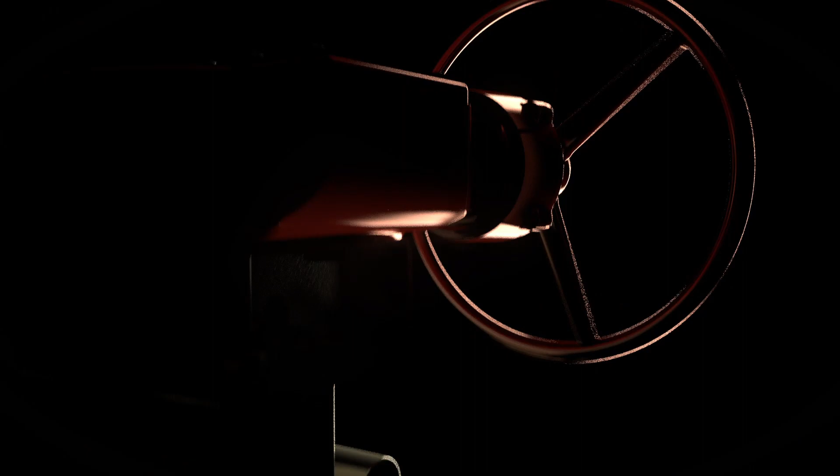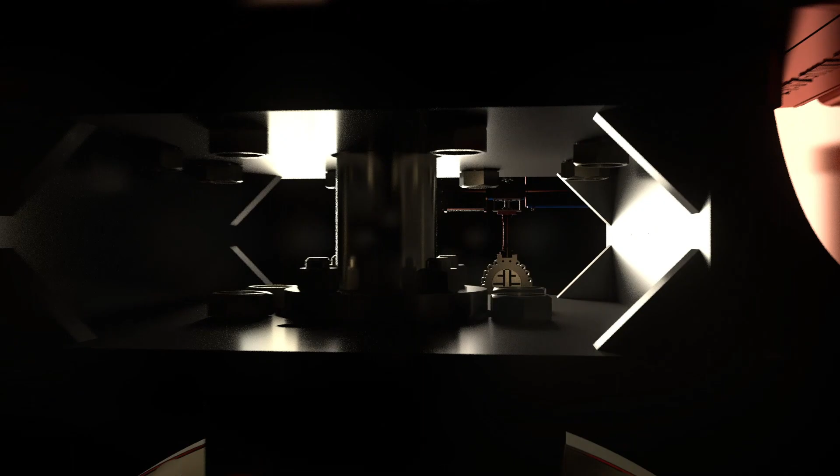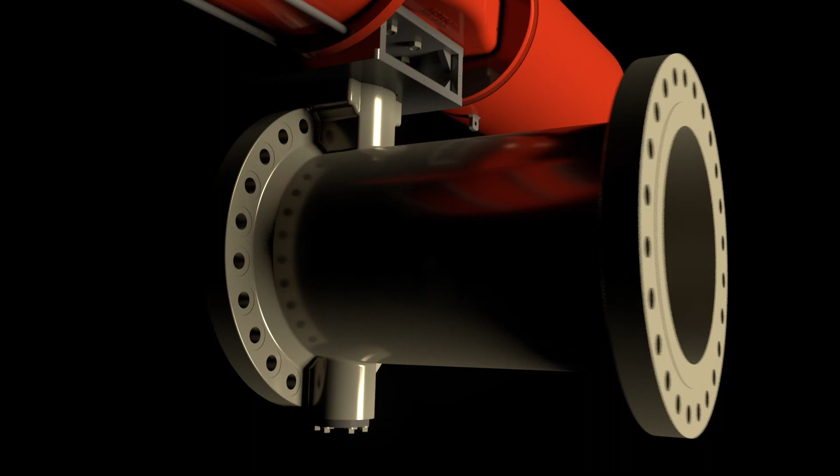Masoneilan 33000 series triple offset valves incorporate patented design features and advanced manufacturing methods to provide bi-directional, zero leakage for a wide range of sizes and pressures for both control and isolation applications. In addition to reliability and exceptional performance, these valves offer unmatched ease of maintenance that translates into real cost savings.

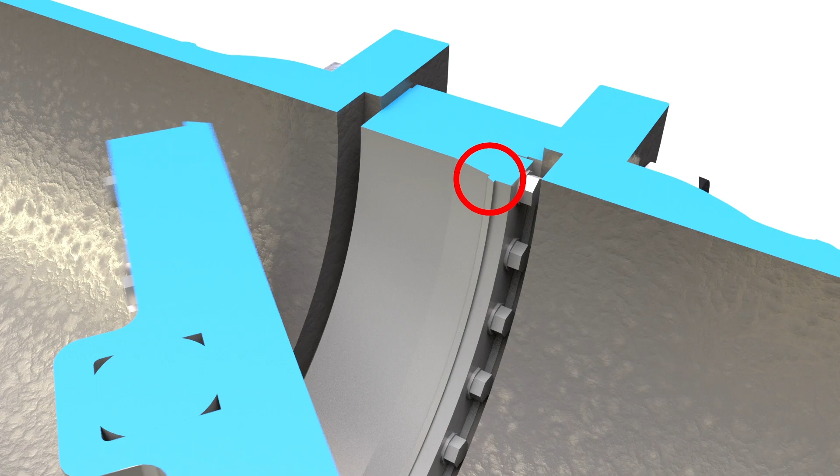The triple offset design provides smooth operation with ultra-reliable metal-to-metal sealing. There's no contact between the disc and seat ring until the final closing. This eliminates friction during throttling, which increases efficiency and eliminates the need for elastomers, soft seats, or liners.

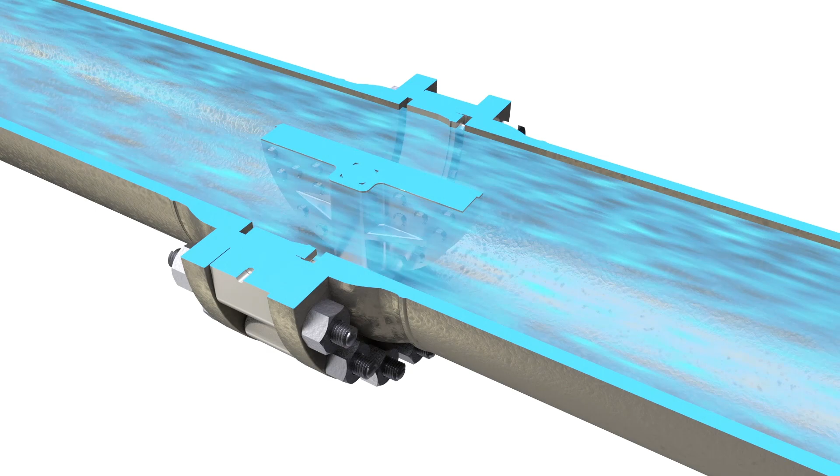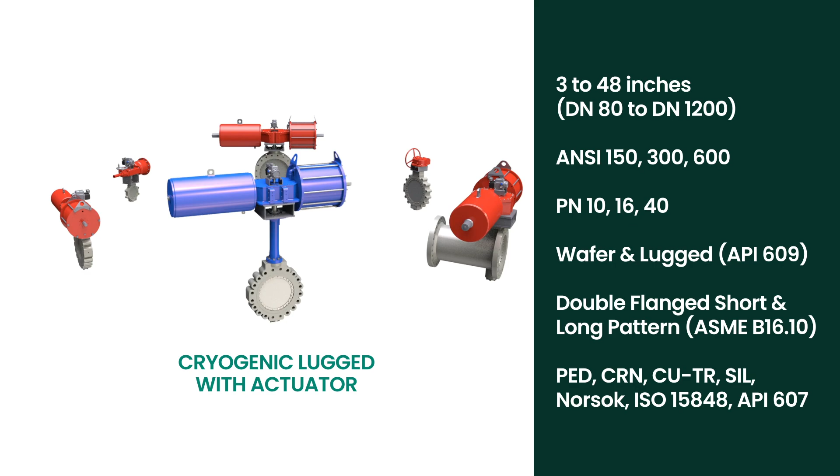Available in a wide range of sizes, ANSI classes, materials, and end connections, these valves can be utilized in a variety of applications. And by meeting or exceeding global performance and design standards, you can have confidence in these valves' ability to deliver.

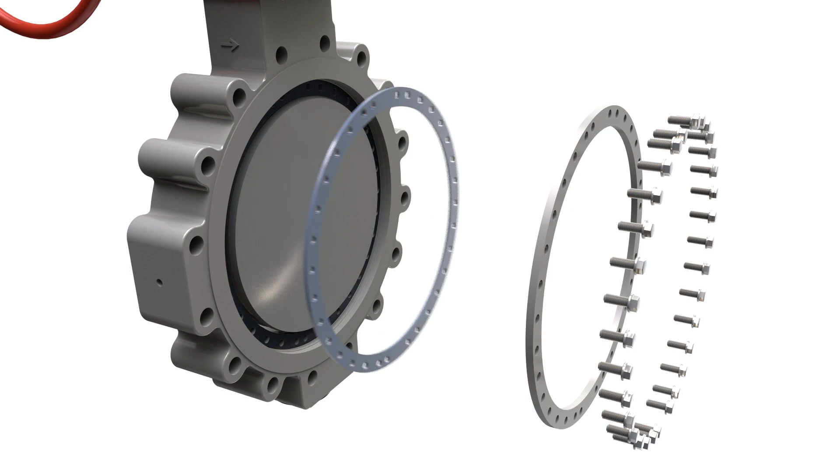Field replaceable seat rings and a two-piece disc design enable quick inspection, removal, and replacement without disassembly, letting you avoid costly plant downtime. Since you only need to replace the specified component rather than the entire valve body, you also realize significant savings for parts costs and labor.

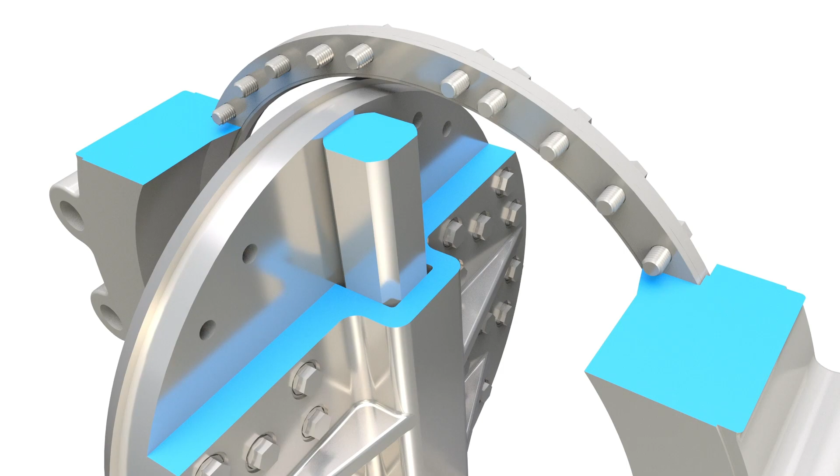The square shaft eliminates backlash with torsional stress distributed over multiple areas, unlike keyed or pinned designs that could be compromised over time.

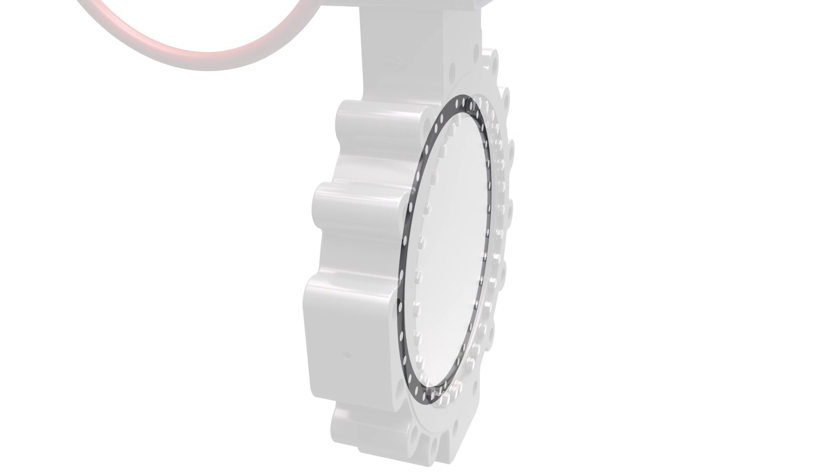The disc sealing technology requires only one gasket under the seat ring. This eliminates a gasket in the disc, so there's one less leak path and more reliable performance.

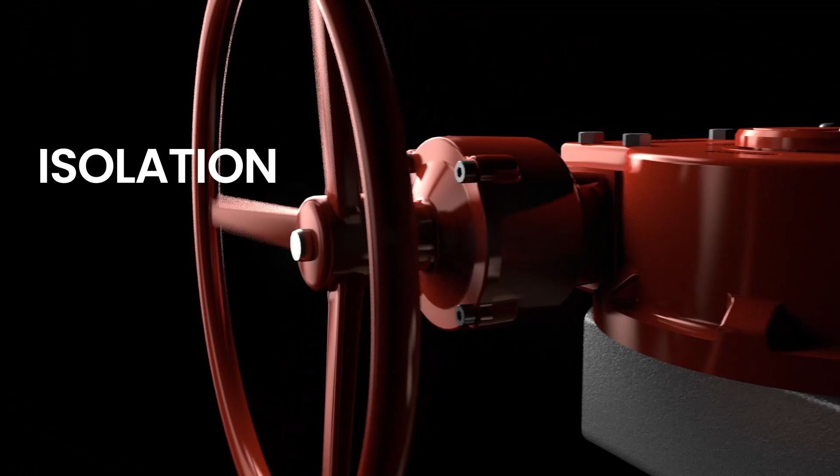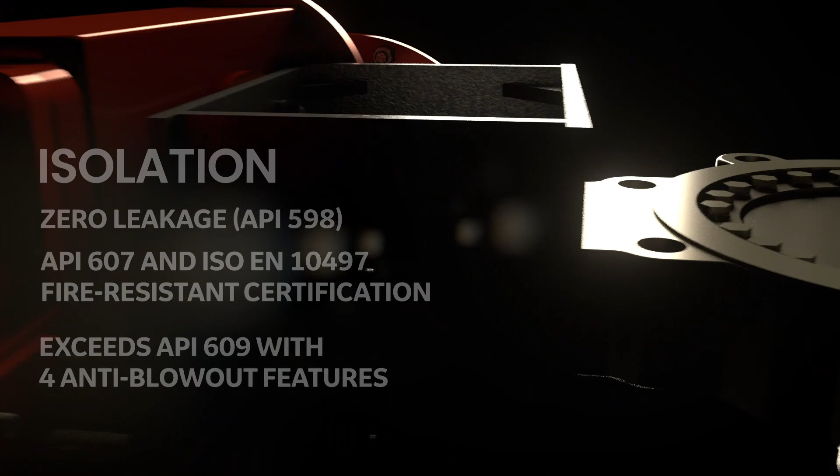These valves are ideal for isolation, on-off, and emergency shutdown applications due to their reliability and true bi-directional zero leakage performance. The patented seat and seal technology, along with advanced manufacturing practices, results in a robust metal-to-metal seal that meets or exceeds industry standards. For flow and process control applications, the 33000 series can be equipped with an actuator and instrumentation to provide reliable performance and high capacity.

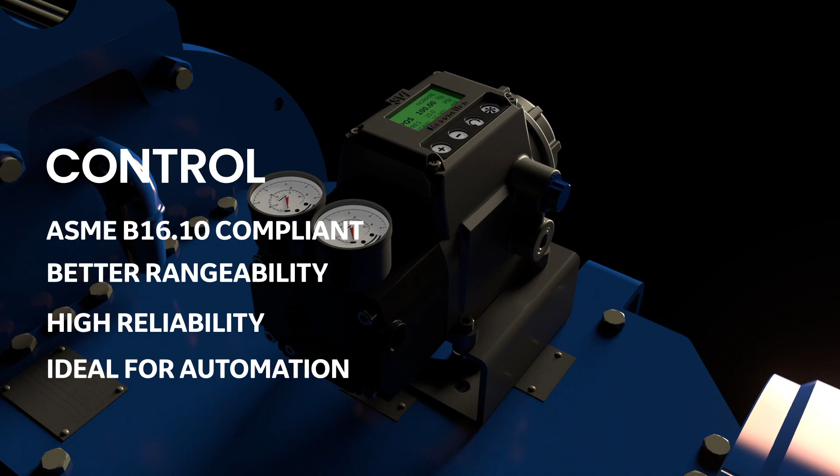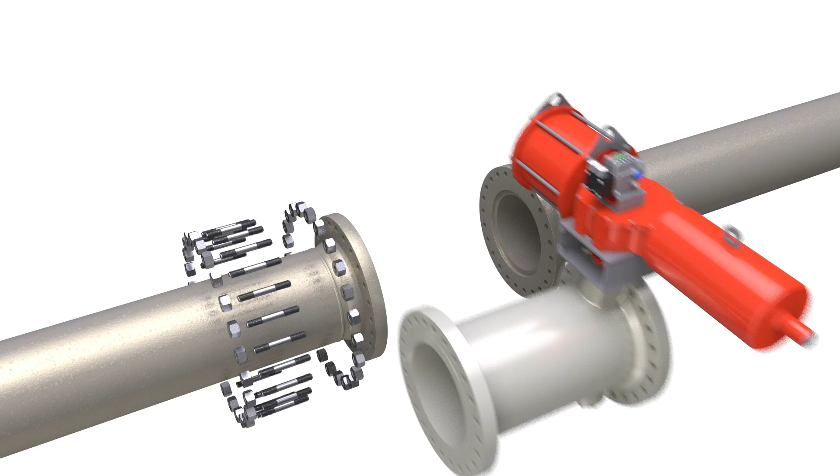With a variety of end connections available, customers can easily replace gate, globe, and ball valves without modifying any piping.

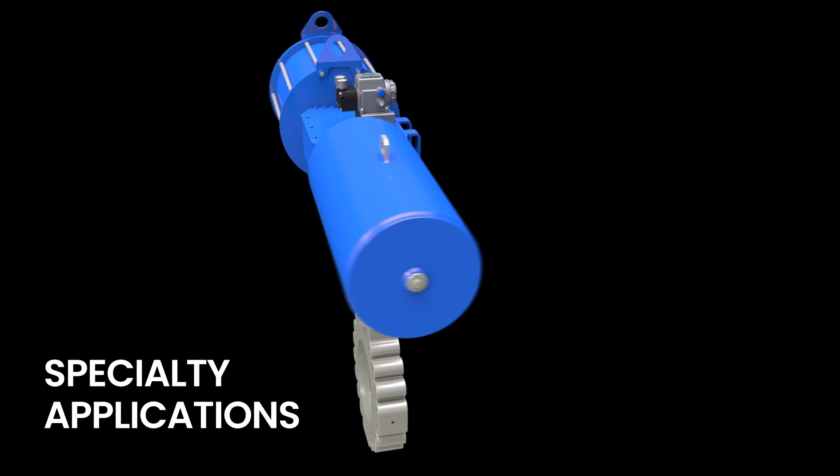Designed with metal-to-metal seats and an optional extended bonnet, these valves are ideal for maintaining zero leakage under harsh conditions, including LNG cryogenic conditions and fire-resistant environments.

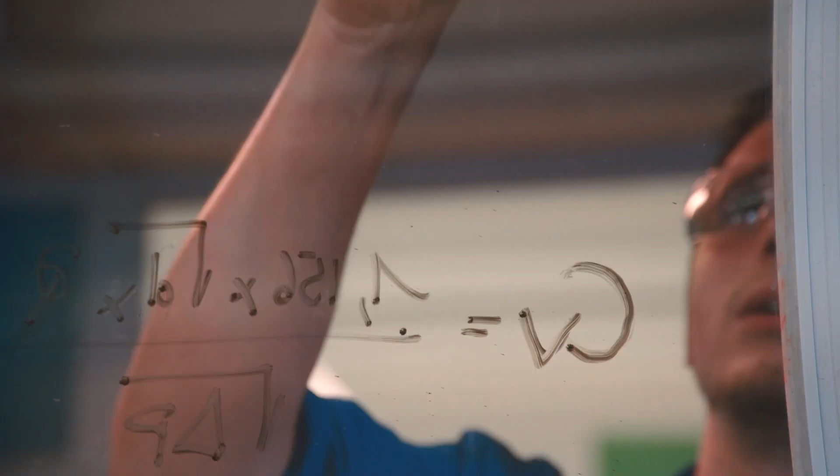The new Masoneilan 33000 triple offset valves draw on the operating experience of thousands of Baker Hughes valves installed worldwide for decades. It's a versatile product line that delivers zero leakage, high capacity, reliable performance, and ease of maintenance in both control and isolation applications. Learn more at valves.bakerhughes.com.